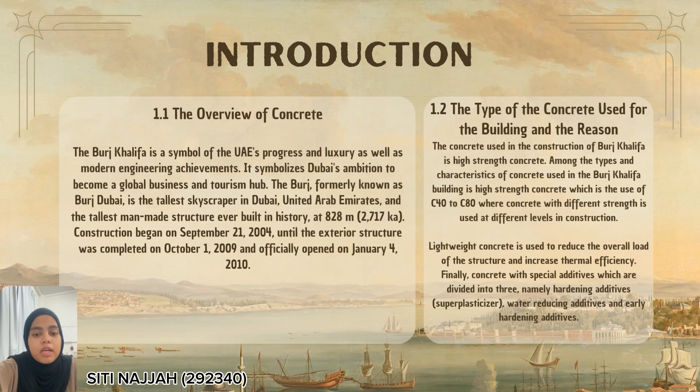Finally, concrete with special additives, which are divided in three, namely hardening additive, superplasticizer, water reducing additive, and early hardening additive.

Today I will continue our group presentation on the first content, which is the detailed analysis of the material used in Burj Khalifa. So as we know, Burj Khalifa is an iconic skyscraper in Dubai, and Burj Khalifa is the tallest building in the world. The first material used to construct Burj Khalifa is the foundation.

So the Burj Khalifa structure is supported by a large reinforced concrete mat, and the thickness of the mat is 3.7 meters and was constructed in 4 separate castings totaling 12,500 cubic meters of concrete. And the piles used are 1.5 meters in diameter by 43 meters.

Other than that, in order to minimize the effect from corrosive chemicals in the underground water, construction of the Burj Khalifa used concrete that has high density, low permeability, and a cathodic protection system under the mat. So we can see in the picture that it used many piles in the foundation of the Burj Khalifa.

The second material used is the podium. Podium is known as a pedestal or platform construction. Podium construction is a type of building characterized by a horizontal division between a tower and a lower podium. In construction terms, podium is recognized as a divide between the lower part and the upper part of the building. And the lower part is called the podium.

And it contains 1 or 2 floors and is built from a robust structural system such as steel or reinforced concrete. So in Burj Khalifa, the podium provides a base that anchors the tower to the ground and allows access from 3 different sides to 3 different levels of the building.

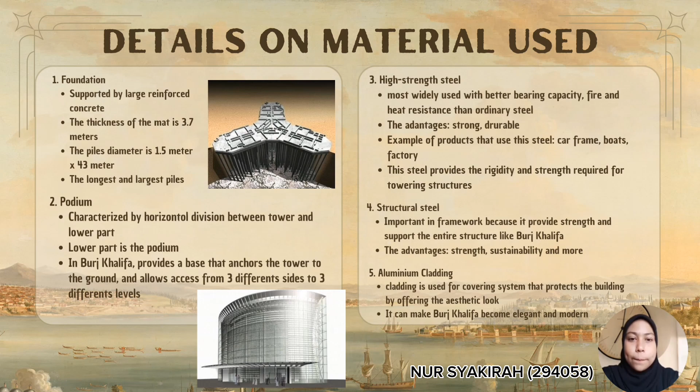So they use the aluminum cladding to make the building look too good, too beautiful, too modern, to attract the tourists to go to Dubai just for the Burj Khalifa. And other than that, Burj Khalifa is the tallest building in the world, so they need to construct the modern design at the outside of the buildings.

I would like to present about physical Burj Khalifa, like density. The density of the concrete used in the Burj Khalifa was an important consideration. High performance concrete typically has a density of 2,400 until 2,500 kg. The use of thick concrete was required to assure the structure, strength and stability, particularly considering the building's vast height and gravitational stresses. A higher density concrete can support more weight, which is critical for the bottom floor of the tall structure.

Next, porosity. The porosity of the concrete used in the Burj Khalifa needs to be precisely regulated. High performance concrete often has reduced porosity, which is important for a variety of reasons. Reduced porosity increases durability by limiting permeability, making it more resistant to water and other corrosive chemicals that might cause deterioration.

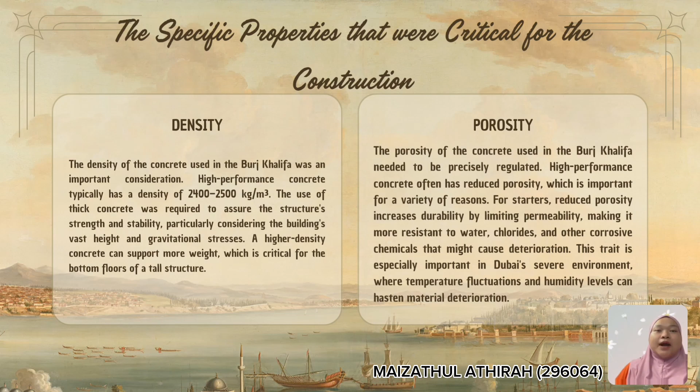So now I would like to talk about mechanical properties on Burj Khalifa. As we know, the Tower of Burj Khalifa, situated in Dubai, is known as the tallest structure on the earth, which has been possible through the selection of right material and their mechanical properties. It has several notable mechanical properties that ensure its stability, strength, and functionality, which are compressive strength, tensile strength, and modulus of elasticity. So, point number one is compressive strength.

Number one is high strength concrete selection. For the Burj Khalifa, concrete with a compressive strength of at least 80 megapascal was chosen to ensure the building's stability under immense gravity loads, including its own weight, occupants, and furnishing. Number two is load-bearing capacity. The high compressive strength of the concrete is essential for supporting the massive loads transferred to the lower levels. The function is preventing deformation or failure.

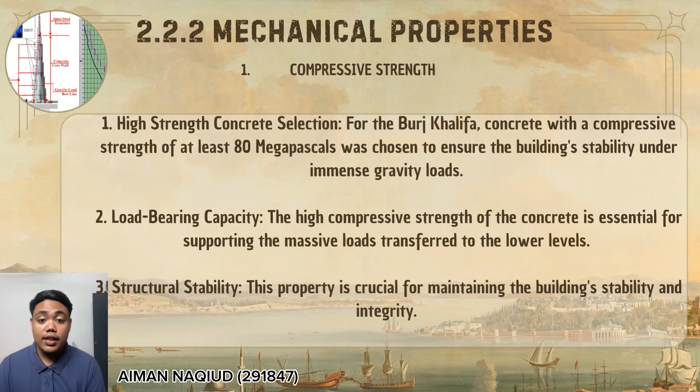And number three is structural stability. This property is crucial for maintaining the building's stability and integrity, ensuring it remains structurally sound despite its towering height. So next is tensile strength. In the context of the Burj Khalifa, tensile strength refers to the ability of the material used. This is crucial for the building's stability because it helps prevent structural failure and cracking due to tension forces.

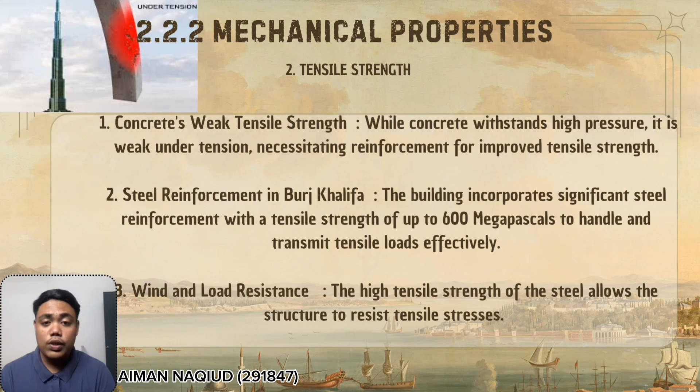Number one is concrete's weak tensile strength. While concrete withstands high pressure, it is weak under tension, requiring reinforcement for improved tensile strength. Number two, steel reinforcement in Burj Khalifa. The building incorporates significant steel reinforcement with a tensile strength of up to 600 megapascals to handle and transmit tensile load effectively. Number three is wind and load resistance. The high tensile strength of the steel allows the structure to resist tensile stresses such as those from wind forces, preventing cracking and structural failure.

Next is the modulus of elasticity. In the context of the Burj Khalifa, the modulus of elasticity refers to the measure of a material's ability to deform elastically when a load is applied. Number one is Young's modulus and elastic deformation. Young's modulus measures a material's ability to deform elastically under loads. It is for preventing deformation in the material used to construct Burj Khalifa.

Number two is concrete's modulus of elasticity. The Burj Khalifa used stressed concrete with a modulus of elasticity between 30 to 40 GPa, which means gigapascals, to maintain the building's shape under loads. And number three is steel reinforcement elasticity. The steel reinforcement in the structure has a high modulus of elasticity, ensuring rigidity and integrity, especially against dynamic forces like wind and natural disasters like earthquakes.

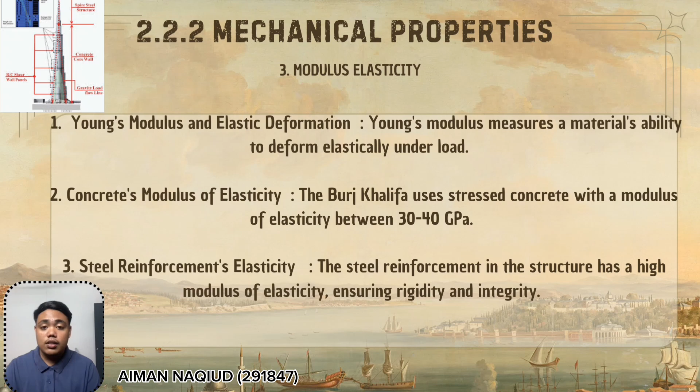Next is durability factors, including resistance to environmental challenges. The Burj Khalifa design has a Y-shaped floor plan and a tapering form which limits wind pressure and the influence of vortex shedding, reducing oscillation. The external cladding was designed to endure Dubai's conditions, including high temperature, UV radiation, and sand erosion, while requiring minimal maintenance. Next, waterproofing measures, such as waterproof membranes and drainage systems, were used to keep groundwater from entering the basement and foundation.

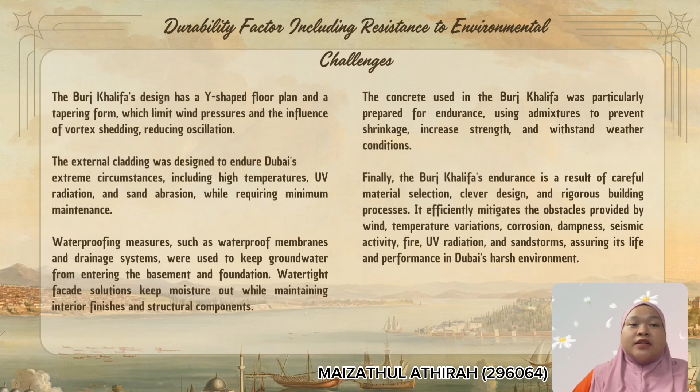So finally, the Burj Khalifa's endurance is a result of careful material selection, clever design, and a rigorous building process that address temperature variation, corrosion, dampness, seismic activity, fire, UV radiation, and sandstorms, assuring its life and performance in Dubai's harsh environment.

I will talk about the production and construction process of Burj Khalifa, and next, I will talk about the challenges during construction and how they overcame them. The first one is concrete production and mixing.

The Burj Khalifa construction used over 45,000 cubic meters of concrete for its foundation and a total of 330,000 cubic meters of concrete along with 39,000 tons of steel rebar. The rebar laid end to end would exceed 25% of Earth's circumference.

The concrete mix, which included the additive Glenium Sky 504, allowed it to be pumped to a height of over 600 meters and remain workable for up to 3 hours. High performance Portland cement, crushed sand, gravel and chemical admixtures were used to ensure the concrete strength, workability and durability.

Next is placing, which is pumping and placement. In November 2007, the Burj Khalifa set a record by pumping concrete to a height of 601 meters, surpassing the previous record. The concrete was pumped using a high-pressure Putzmeister 14,000 SHP-D pump, moving at about 200 bars of pressure.

It took 40 minutes for the concrete to travel from the hopper to the top, with each piston stroke moving 26 tons of concrete. Over 32 months, this pump and two others delivered nearly 165,000 cubic meters of high-strength concrete.

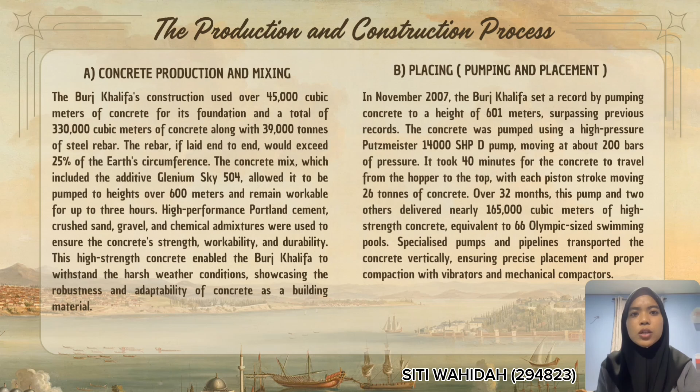Next one is curing. In Dubai's extreme weather, the Burj Khalifa concrete needed careful curing to ensure strength and durability. Curing agents and water spray prevented rapid evaporation, while temperature control involved using ice, crushed stone and cold water. The concrete was kept wet for days to weeks with a blanket and shaded, protecting it from temperature change.

Advanced sensors monitored temperature and moisture in real time, and concrete was poured in 3-meter layers to manage the heat of hydration. Regular testing ensured the concrete met the necessary strength and quality standards. The last one is construction techniques.

The Burj Khalifa construction used innovative methods like a self-climbing formwork system for efficient, continuous building of vertical components. High-strength reinforced steel ensured structural integrity with bars carefully positioned and secured. Embedded sensors allowed real-time monitoring of concrete temperature and strength, and regular testing ensured quality. These advanced techniques and ongoing monitoring enabled the successful construction of the world's tallest building.

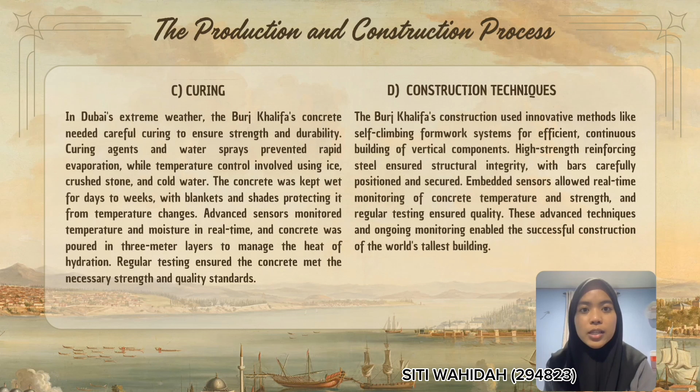There are a few challenges and the way they overcame them. First, pumping high-performance concrete. There were many difficulties in pumping high-performance concrete to heights that were never before possible. However, a record pumping height of 601 meters was accomplished with the use of a new mixture, altered procedures and strong pumps like the Putzmeister 14,000 SHP-D.

Next is logistical and safety issues. In order to address the logistical and safety issues associated with pumping concrete at high elevation, samples were routinely examined in a site laboratory to assess the concrete state during pumping.

Next is curing and cracking. Proper curing prevents cracking in Dubai's humid climate. Techniques like spray curing chemicals and controlled permeability formwork liners improve the concrete strength and appearance. Additionally, the mild temperatures and use of crushed limestone aggregate reduced the need for formwork insulation to prevent thermal cracking. And lastly, mix design and quality control.

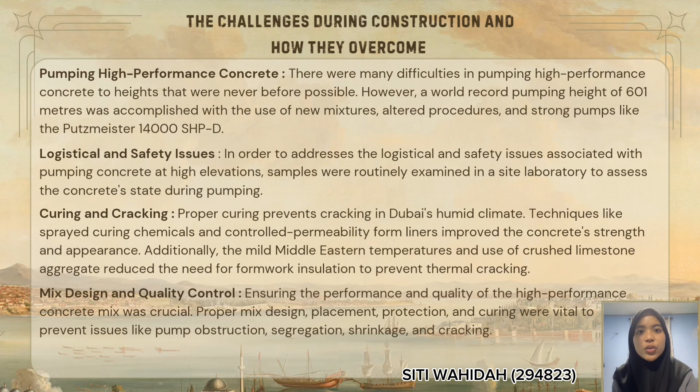Ensuring the performance and quality of the high-performance concrete mix was crucial. Proper mix design, placement, protection, and curing were vital to prevent issues like pump obstruction, segregation, shrinkage, and cracking. So what is slump testing? Slump testing was a primary procedure used on concrete during the construction of the Burj Khalifa. This test assessed the workability and uniformity of newly mixed concrete before it sets.

So the procedure of the slump testing. First, the fresh concrete is poured into the conical mold. The mold is then removed. The vertical distance that the concrete slumps is measured. The purpose of slump testing: the test results provide insights into the concrete's fluidity. Understanding the concrete's fluidity is crucial for ensuring it can be properly poured and compacted, especially on a large-scale project like the Burj Khalifa. The importance of the proper slump measurement.

The first one is achieving the proper slump was critical for the Burj Khalifa. A low slump indicates stiff concrete, which is difficult to work with and may lead to inadequate compaction. A high slump suggests very moist concrete, which can weaken and deteriorate when hardened. Achieving balance in concrete mix: the project required a precise balance to ensure the concrete could be pumped to unprecedented heights without compromising its qualities.

Compressive strength testing. So what is the importance of that test? First things first, compressive strength is a crucial characteristic of the concrete. It indicates the concrete's capacity to support weight without crumbling.

Testing compressive strength. During the construction of the Burj Khalifa, concrete samples were frequently tested for their compressive strength. Concrete specimens are typically cast in molds, cured under controlled conditions, and then crushed in a compression testing machine at a predetermined age.

Necessity for high compressive strength. Ensuring the concrete had the necessary compressive strength was essential for the Burj Khalifa. The building's height and the weights it had to bear required incredibly strong concrete. Consistency and reliability in testing. To guarantee consistency and reliability, engineers and material scientists likely conducted this test frequently and in various settings.

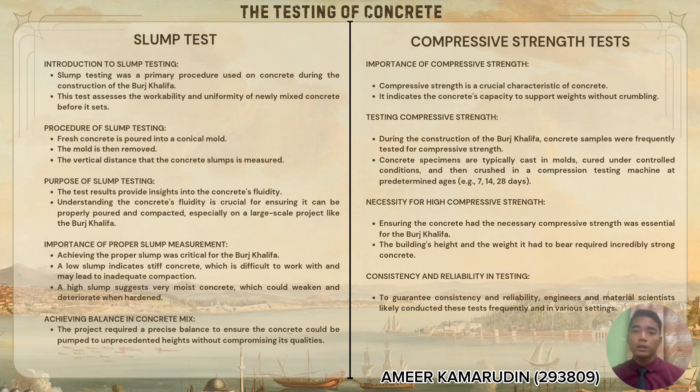Special tests due to unique project requirements. The first one is the pumpability test. Pumping concrete to enormous heights was one of the Burj Khalifa's special requirements. When pumped to such heights, regular concrete may separate or become unworkable. Pumpability tests were therefore necessary to guarantee that the uniformity and quality of the concrete mix would not be compromised during transportation by pumps.

Temperature control test. The weather in Dubai presented yet another formidable obstacle. Elevated temperatures have the potential to quicken the concrete setting period, resulting in fracture and diminished durability. Tests specifically designed to regulate temperature were carried out in order to create a concrete mixture that would not crack under the intense heat. In order to regulate the temperature rise within the concrete throughout the curing process, this involved evaluating the impacts of various admixtures and curing techniques.

Creep and shrinkage tests. The long-term deformation of concrete under sustained load and environmental changes brought on by moisture loss might have a substantial effect on the stability and appearance of the structure, given the height of the Burj Khalifa. Therefore, in order to forecast these long-term behaviors and to design structural components and concrete mixtures that will lessen their effects, creep and shrinkage studies were carried out.

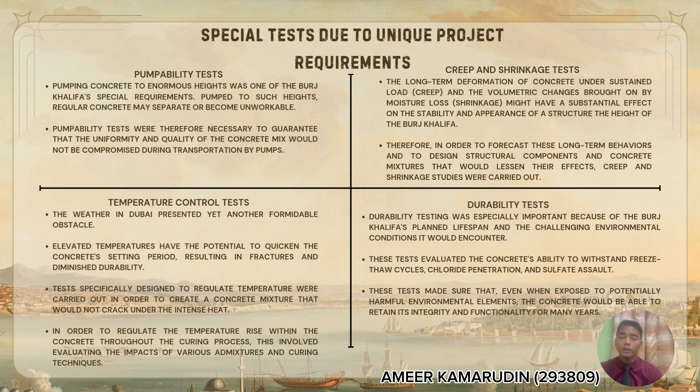Durability tests. Durability testing was especially important because of the Burj Khalifa's planned lifespan and the challenging environmental conditions it would encounter. These tests evaluate the concrete's ability to withstand freeze-thaw cycles, chloride penetration, and sulfate attack. These tests made sure that even when exposed to potentially harmful environmental elements, the concrete would be able to retain its integrity and functionality for many years.

2.5. The architectural significance and specific use of concrete in the structure. The Burj Khalifa is one of the tallest buildings in the world and represents cutting-edge building design. From initial concept to completion, the combination of several key technological innovations and innovative structural design methods has resulted in an efficient and robust superstructure.

Structurally, the Burj Khalifa is designed with a Y-shaped three-part floor geometry. The Burj Khalifa used a Y-shaped floor plan. This plan provides higher performance and provides a full view of the Persian Gulf. The shape and upward setbacks help the structure reduce the wind forces acting on it. After discussion, the shape was finally improved and changed based on a series of wind tunnel tests. The structural system used for the Burj Khalifa can be called the buttressed core system.

Specific use of concrete in the structure: the Y-shaped plan is intended to form the core of the Burj Khalifa structure. In addition to its artistic and functional benefits, along with keeping the structure simple and enhancing constructability, this design reduced wind forces on the tower. The structural system is known as a buttressed core, which consists of high-performance concrete walls. Each wing supports a hexagonal hub or central core with 6 sides. Similar to an axle, this central core provides torsional resistance to the structure.

For example, the spire, the Burj Khalifa's telescopic tower made of over 4,000 tons of structural steel, is its most striking feature. Hydraulic pumps were used to build the spire from within the building and raise it to its full height of more than 200 meters.

Second is mechanical flooring. The equipment that powers the Burj Khalifa is housed on 7 two-story mechanical floors. Electrical substations, water tanks and pumps, air handling units, and other components that are necessary for the tower's operation and the comfort of its residents are located on the mechanical floors, which are spread over the 30 floors.

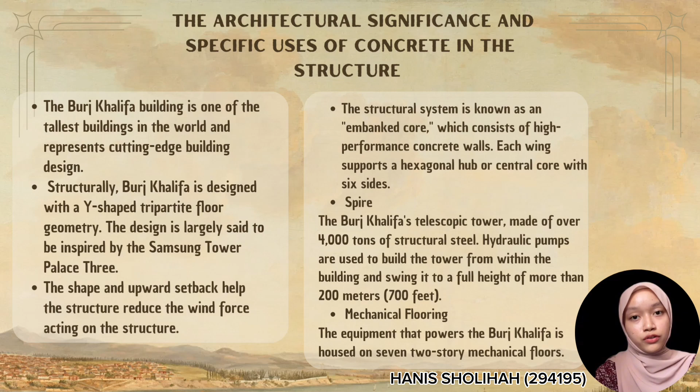Conclusion: the Burj Khalifa, located in Dubai, United Arab Emirates, is an incredible landmark and impressive feat of engineering. The Burj Khalifa is an engineering and architectural marvel whose iconic design, inspired by the geometry of the Hymenocallis flower and Islamic culture, results in a unique and aesthetic structure. There has also been criticism of the working conditions and rights of workers involved in its construction. The Burj Khalifa brought a great impact on the economy, tourism and image of the city despite facing various challenges in its construction.